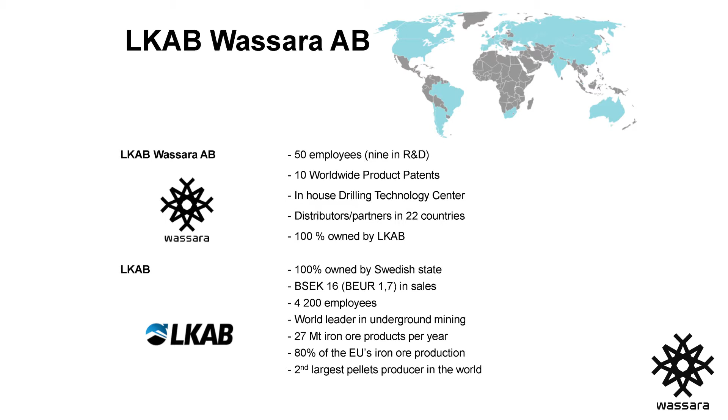LKAB has 2 mines in the northern part of Sweden, in Scandinavia. They are very strong in logistics, which you have to be for iron ore production. They have a logistics system so they can ship the pellets, the final result from the mining process, with one harbor in Norway and one in the Baltic Sea.

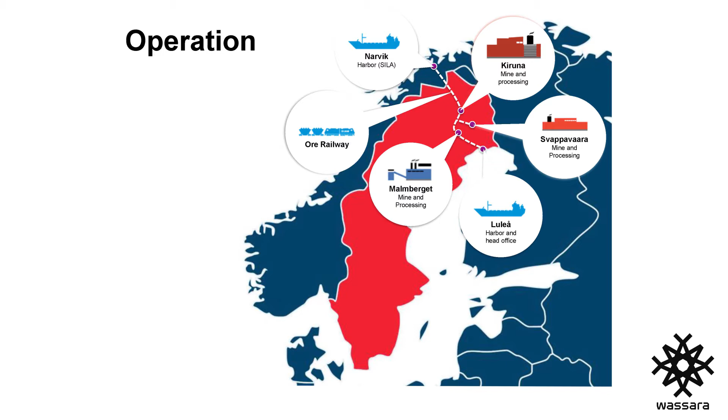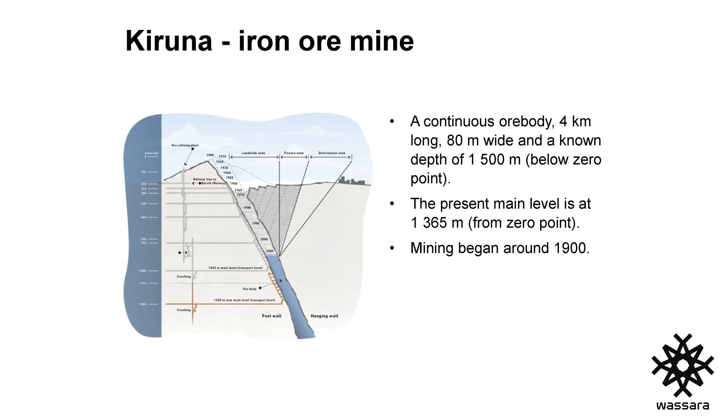The biggest mine is the Kiruna mine, in operation for more than 100 years. It's a continuous ore body looking like this. The other mine is called Malmberget mine, which is a little different, with a number of ore bodies. It also has a very long production history, more than 100 years.

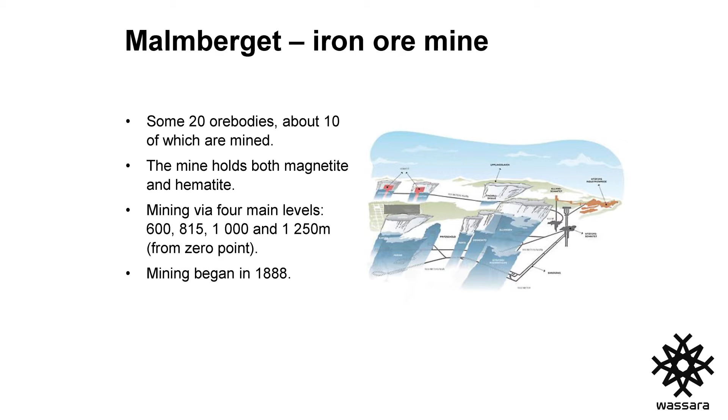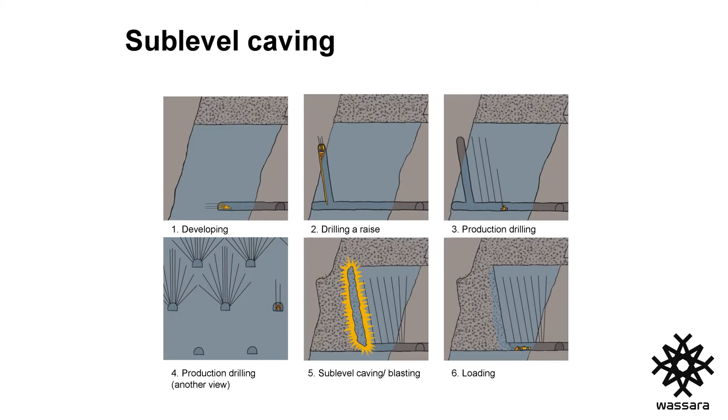Both mines use sub-level caving. The drilling is done in a fan shape, like this. You do the development, you do the drilling of a raise, and then you do the production drilling. The Wassara part is done in the production drilling; the other parts use other drilling technologies.

If we go back, say 25 years ago, LKAB had huge problems with profitability. They were more or less bankrupt, so they had to do something with the whole logistics and process, because they mainly compete with big open pit mines, like in Brazil or Australia. If you're not good in logistics, you cannot compete with an underground mine in iron ore. You have to have the mass, the big scale operation, and keep the cost down, otherwise you will not survive.

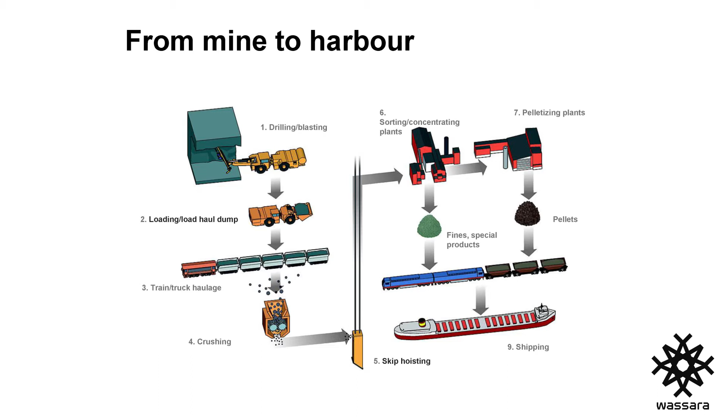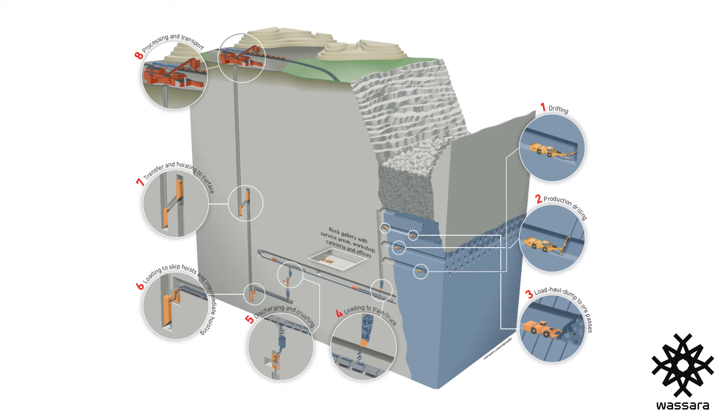So they started a project involving a number of different things. Inside the mine, they improved more or less everything, but a very important part was the production drilling. To upscale everything, you have to drill long holes and be able to blast a big mass every time. Then they came in contact with Wassara, the people developing this water-powered down-the-hole hammer.

Actually, it was 3 guys in Atlas Copco who came up with the idea of using high-pressure water instead of high-pressure air for powering down-the-hole hammers. Atlas Copco were not really interested, since they had their own compressors and other techniques, so they didn't believe in it. But LKAB believed in this, so they started working together, forming the Wassara company, and after some years it was a success.

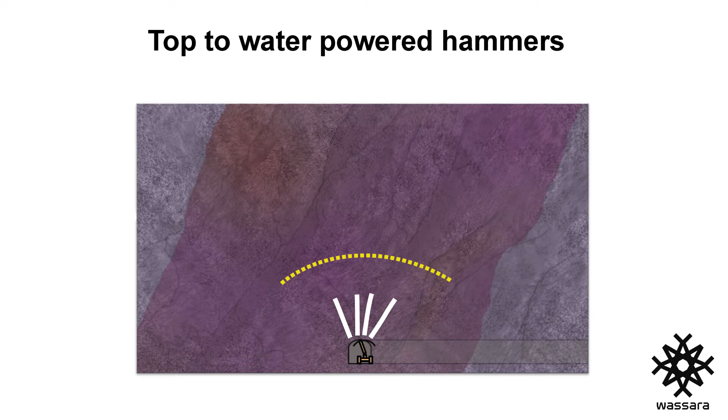So what they do is they drill. In the past, they drilled like this.

They drill with top hammer technology, which you're probably familiar with. It's rather simple, and you drill very fast, but you cannot drill very long holes. You get a lot of deviation, and you lose energy, so you don't have much power left if you reach more than 20 to 25 meters.

So this is what they did in the past. They could not drill very long holes. Then they introduced Wassara, and now they can drill a fan like this.

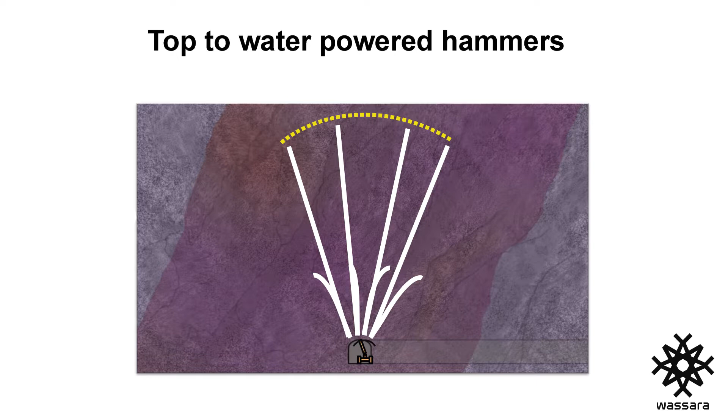Extremely straight holes, more than double the length. The reason why they have to stop now is that the distance between the top part of the holes is getting too big. Otherwise, you can probably drill 100 meters or even more.

So that's not the limitation. The limitation now is that the size of the block when you do the blasting is too big if you go bigger, because you're drilling like a fan. I'll come back to this - the second part of the presentation will show what they are doing in the future, or what they plan to do. This is the limitation now: you cannot drill longer holes because you get too much distance between the holes.

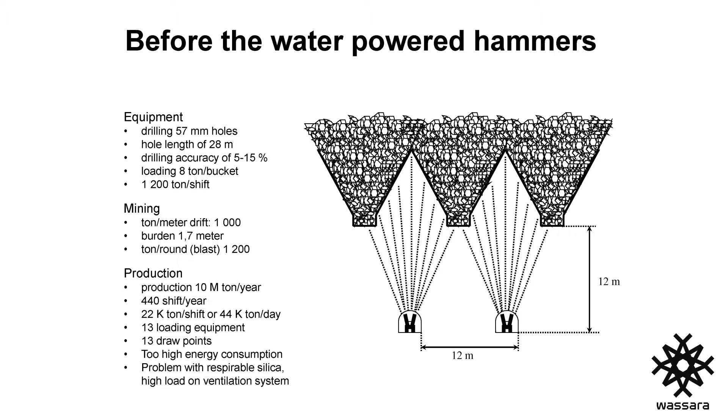So these are just some numbers from the past, before they used the Wassara hammers. They drilled not very long holes, say 28-meter long holes, with relatively small diameters. Every time they blasted, they got 1,200 tons out. They were using a lot of equipment and a lot of people in the mine, meaning they had high costs. And this was not good enough to compete with the open pit mines.

So then they introduced the water-powered hammer. The water-powered hammer is a down-the-hole hammer that uses high-pressure water to power it. We use up to 180 bar if you drill in hard, solid rock. If it's a softer formation, you use less pressure.

The reason why you drill extremely straight is that water is not compressible. So even if it's 1 bar or 200 bar, it's the same volume. So even if you drill with 180 bar, when you release the pressure coming out of the bit, you have no expansion of the media. The same volume of water going into the hammer is also going out of the hammer, meaning the water and the cuttings leaving the bit and going out of the hole move extremely slowly, so you don't need a lot of space between the diameter of the hole and the diameter of the hammer.

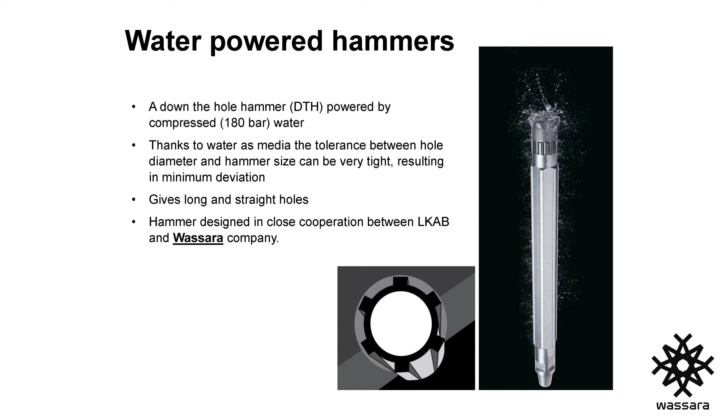As you can see in the pictures, all the hammers have stabilizers or ribs on the side of the hammer, and the ribs have more or less the same diameter as the bit. There's just a 2 to 5 millimeter gap. This is the reason why you drill straight. And if you want to drill even straighter, you put the stabilizer behind the hammer.

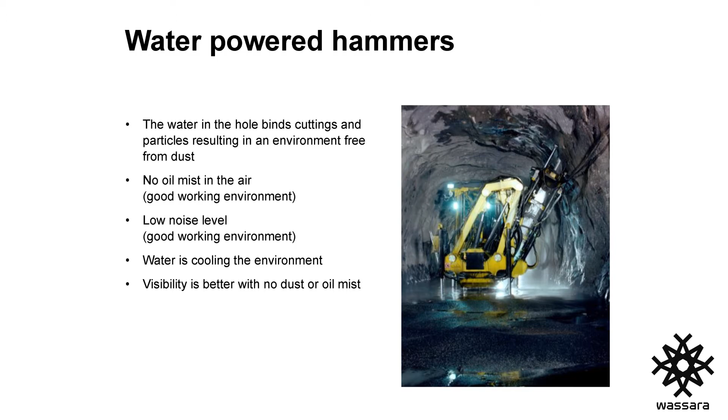Then we started this partnership with LKAB and Wassara. The main reason was the straight holes, but then we also found out there were other benefits. The water binds the cuttings, so it's like fresh air when you are drilling. There's no oil - the hammer is powered by pure water, with no lubricants, no oil in the water or in the air. There's also a low noise level, of course, because you have the hammer in the hole, compared with the top hammer.

And you have the water cooling the atmosphere, so it's a very good working environment for the drillers. It's also very easy to see the operation because you don't have any dust in the air. These are the arguments for mining. When we come to other applications, it's mainly that you drill in a much more safe and careful way - you don't damage the formation you're drilling in because you don't have this expansion of the media. But in mining, it's mainly that you drill straight holes, and it's a very good working environment for the operators.

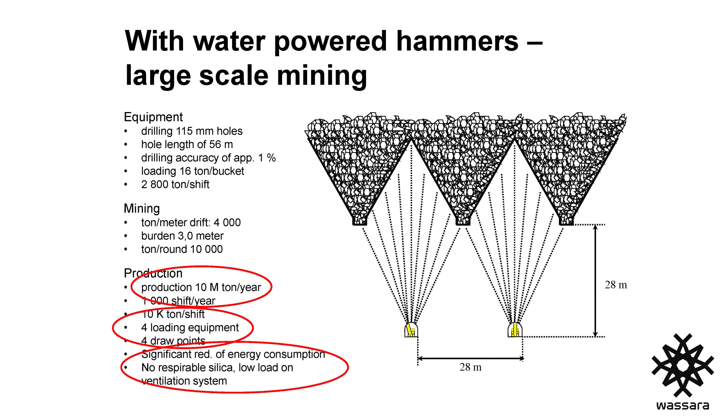So now, using similar numbers but with the water hammers: they drill with a 4-inch hammer today, reaching close to 60-meter long holes. They have very good accuracy - over the 60 meters, they have a deviation of approximately 1%.

So extremely straight holes. And as you can see, the most important number now is that instead of 1,200 tons per blast, you get 10,000 tons per blast. So everything is upscaled - you use less equipment, less people, you reduce your cost, and now the mine is extremely profitable. This is the only technology that can do this in a cost-effective way.

Of course, you can do this with core drilling also. You drill also extremely straight, but then you drill slow, and it's very expensive.

So again, less equipment in the mine, and also a much better working environment for the operators, thanks to no dust. So if we summarize this, increasing the length of the holes gives you a much more profitable operation. So, a short video.

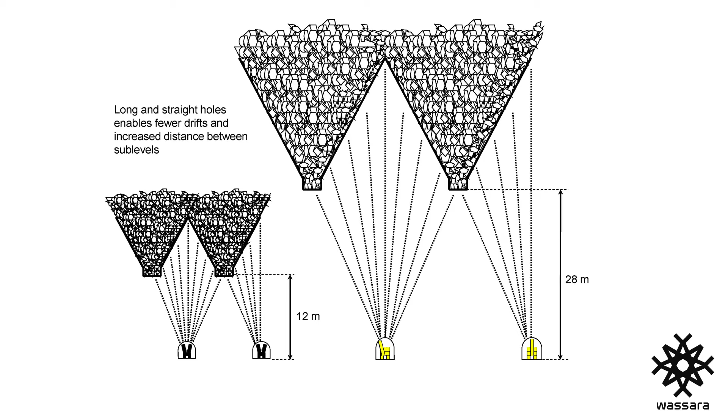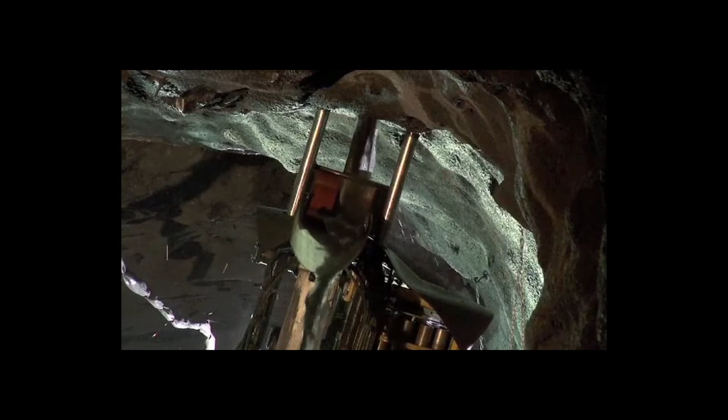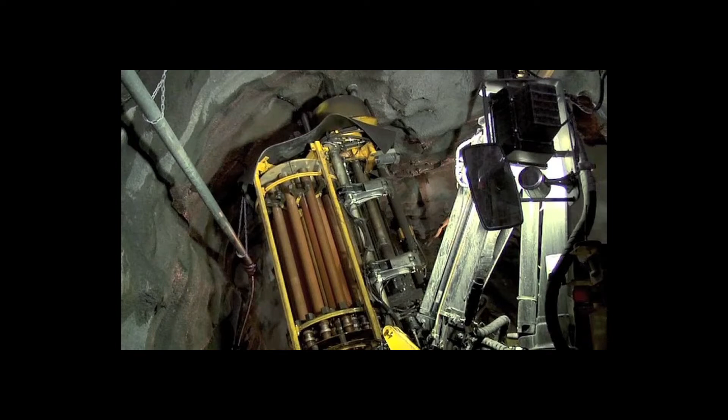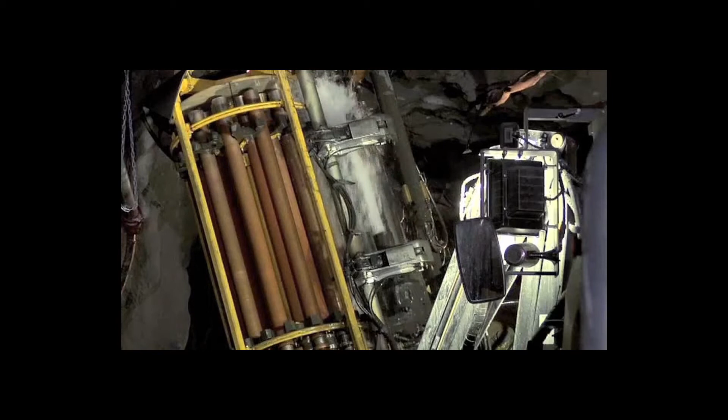Here you see the drilling and the water coming out. No dust, no oil. Water is coming out very slow, and this is another part of the project - most of the drilling is automized, so even if there's no dust, you don't really have operators close to the rigs. This is how it looks like. This is the water. And here you have the operators.

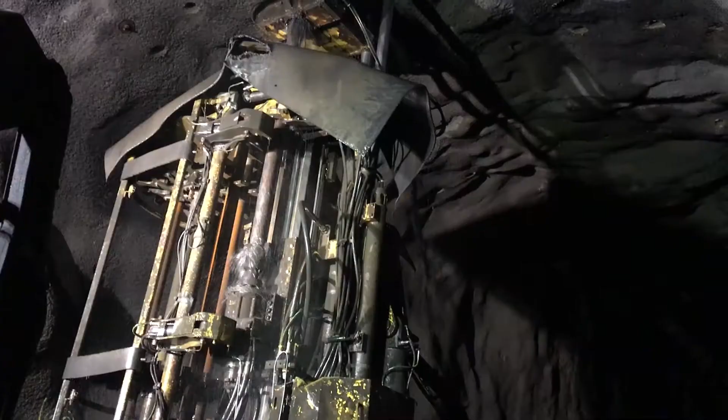Drilling is one part, but they've also done a lot with automation and logistics in the mine. This is showing the working environment at the rig - no dust, very clean, and very low noise level, even if you don't hear it. So this is the upscaling, making the mines extremely profitable.

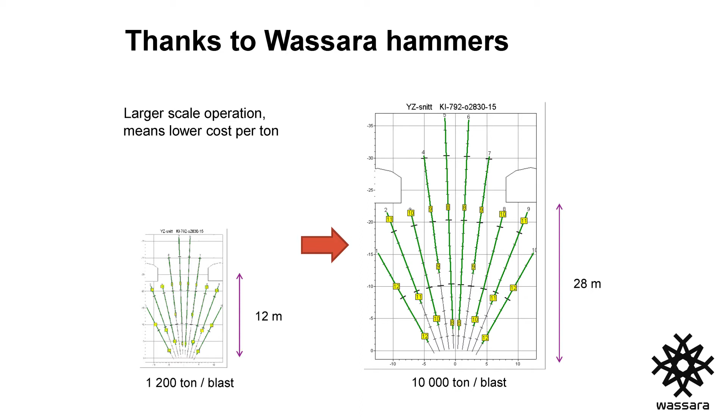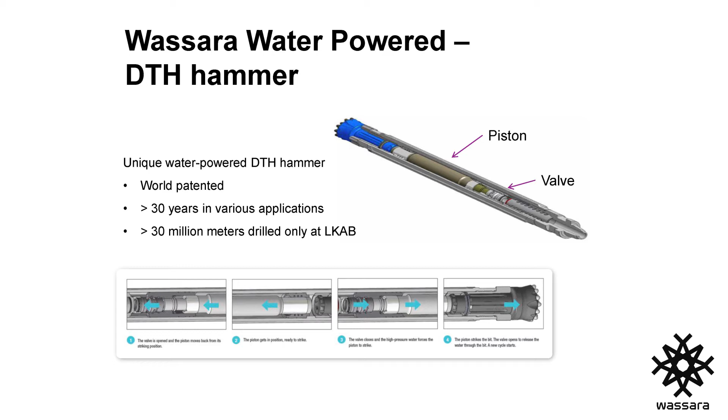So again, this is the hammer. It's nothing new really, it's been on the market for 30 years, so it's very well proven. They are drilling I think 2 million meters every year in the mines using the 4-inch hammer. So it's very similar to an air hammer.

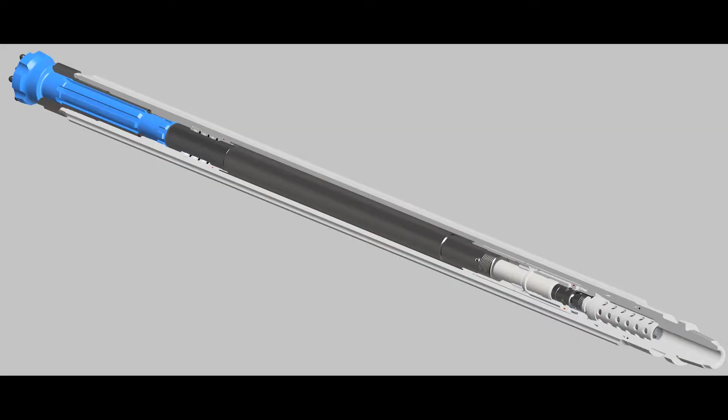You have a piston moving up and down, but thanks to the not-compressible media, you need some other components in the hammer. In this case we have a critical product in the valve - maybe you can see it here. It's a piston moving and a valve moving, and they move in a certain way, opening up channels inside the hammer so the piston can move up and down.

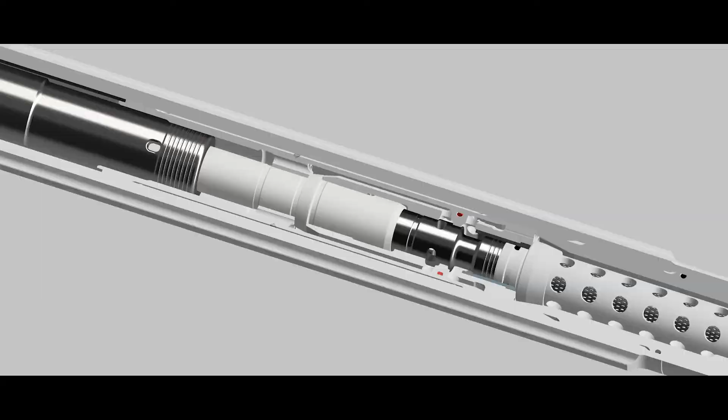And if we go really in detail with this, you see how they work, and it's very tight tolerances here. So it needs to be really clean water going into the hammer. Otherwise you will block the channels and have a lot of wear on the parts. And if you have a lot of wear on the parts, you don't get enough pressure up inside the hammer, so you have to change the parts very frequently. Water quality is very important for us to get a long life out of the hammer.

This is moving with double the frequency of an air hammer - we are between 50 and 70 hertz. So really high frequency, meaning you have to rotate the hammer slightly faster than what you do with an air hammer.

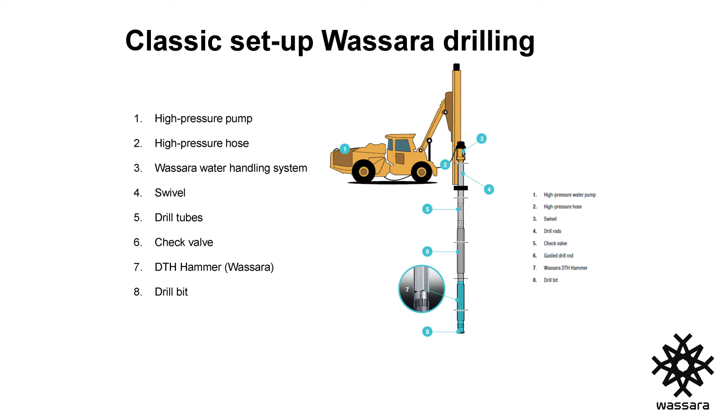This is a typical setup today. You have a rig, a water pump, a water swivel, the drill rods, the hammer and the bit. All this you can buy from us, and now also the rig - you can talk to Medatech about making a special water-powered rig for water-powered drilling. Some clients use a water pump on the rig, but I'd say most clients use a standalone pump, electrical or diesel. So it's up to you if you want it on the rig or not.

So this is a typical setup today. You can drill in all directions. We prefer to drill upwards if possible, because then it's easier for the cuttings to come out. If you drill down, the cuttings come up very slowly, and there's a risk they'll stay in front of the bit and slow your operation. So if possible, we recommend drilling in the upward direction, but there's no problem drilling down, horizontal, or any direction. So this is what they do today.

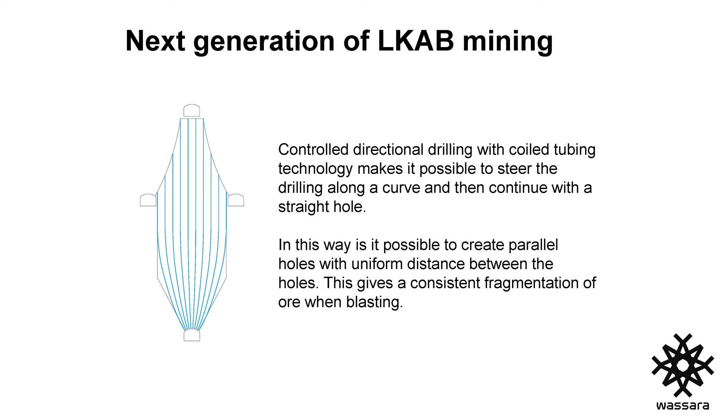So now they've started a new project 2-3 years ago to take the drilling into the next level. What they want to do is this: instead of drilling a fan, they still drill out like a fan, but they'd like to drill the holes in parallel, keeping the distance between the holes, and then you can drill much longer.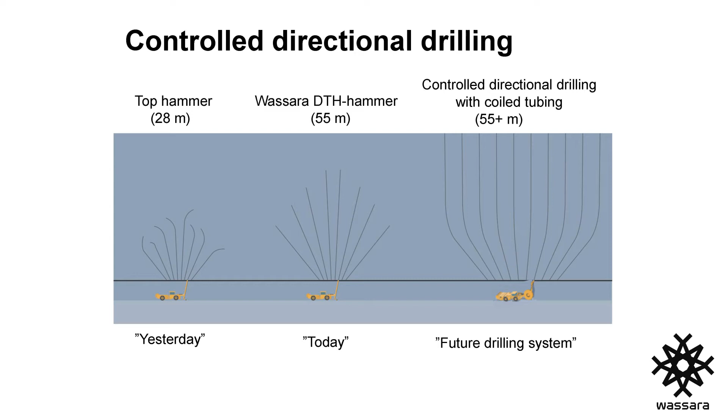So again, in the past: top hammers, short holes. Introducing the water-powered hammers: longer holes. And now the intention is to use a coil tubing rig and drill parallel holes, meaning you control and steer the drilling where you want to go. So you get consistent fragmentation, an optimized draw flow, and because you're using a coil tubing rig, you eliminate the rod handling - so you are very quick in the hole and out of the hole.

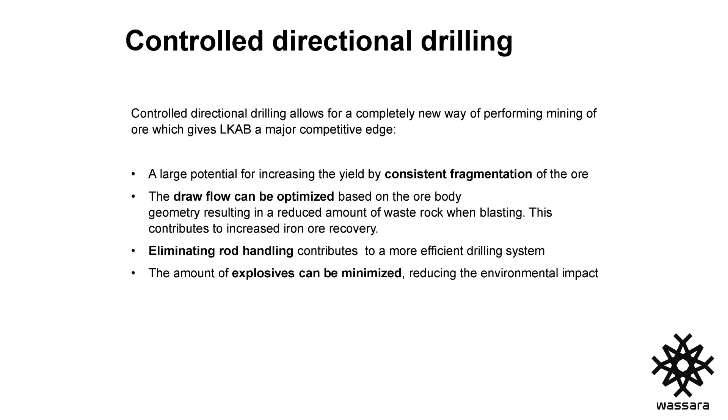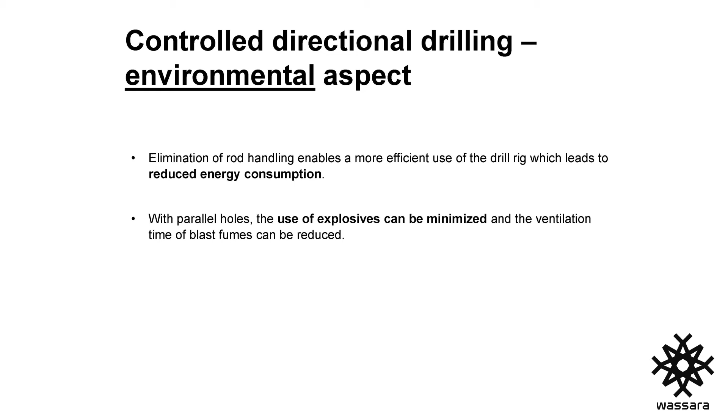And the amount of explosives can be reduced thanks to this. In Scandinavia, environmental aspects are very important, so just to focus on this, you will reduce the energy consumption with this, and you will reduce the amount of explosives. So what is important in the project? We can say it's 4 different parts.

To be able to do this, you need to have a coil tubing rig. Coil tubing rigs are available on the market, but not many of them are drilling in this direction. Most of the coil tubing rigs available on the market are drilling down. Most of the coil tubing rigs available today are using a very, I don't know the exact word, but a big wheel, because if you drill on surface, you are not limited to a certain space. But now we are inside a mine, so you have to make everything small, and you have to drill up. So that's one part.

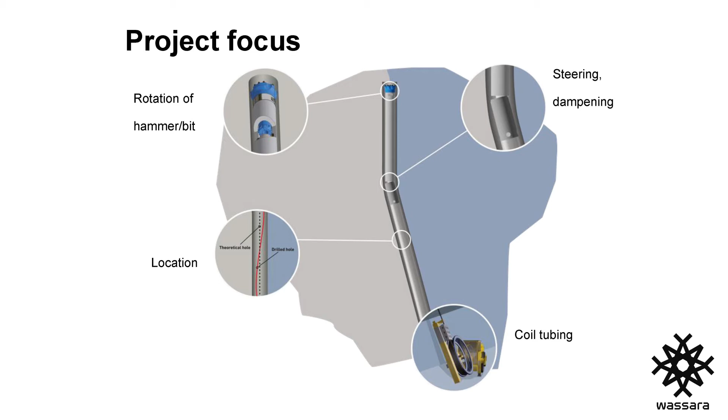The other part is the location. You have to know where you are all the time, even when you are drilling. So during drilling, you have to know where you are. You cannot stop and measure and drill and measure. So when you are drilling, and you are drilling with a hammer that is creating a lot of vibrations, you have to have a tool that can tolerate the vibrations while you are drilling.

The third part is the steering. So you have to be able to steer, go left, right, and in all the directions you want to go. And then you are using a coil tubing rig, so you cannot rotate the drill string or the coil. So you need to find a way to rotate the bit or the hammer that's in the bottom of the hole. So that's the fourth part. So these are 4 different areas we're working on today. We are very close to, or we even have solutions for 3 of them.

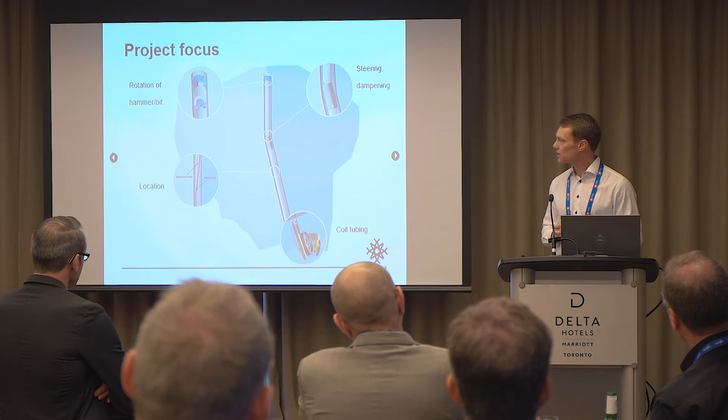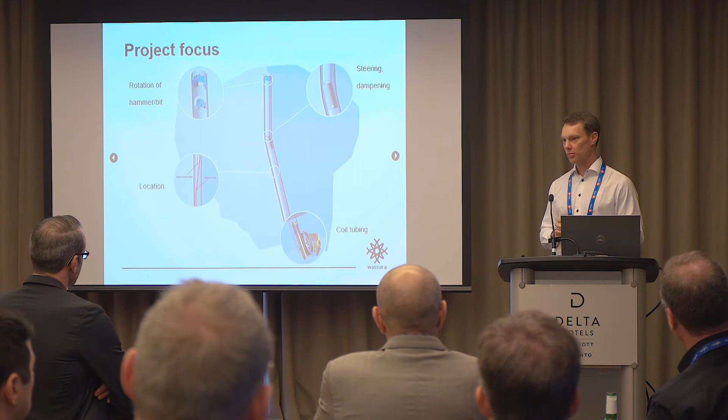Where we are now facing some problems is the rotation of the hammer and the rotation of the bit. The intention was just to rotate the bit, keeping the hammer fixed. Now it seems that we are getting away from that, and we will use a mud motor behind the hammer, rotating the hammer. The problem is that the mud motors available on the market today are expensive, and they are very long. And we don't have that space because we have to bend in a much shorter radius than what you normally do. So we have to make sure we have a mud motor that is small enough, but still powerful enough. So that's also something we're looking into.

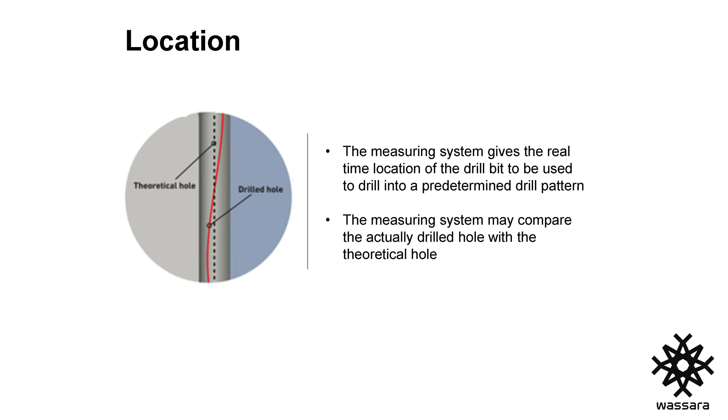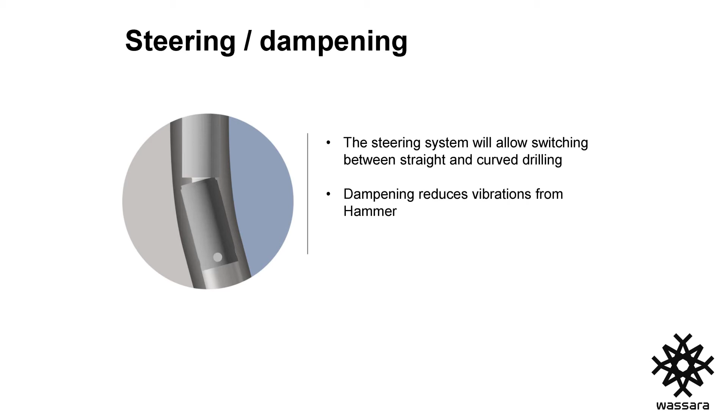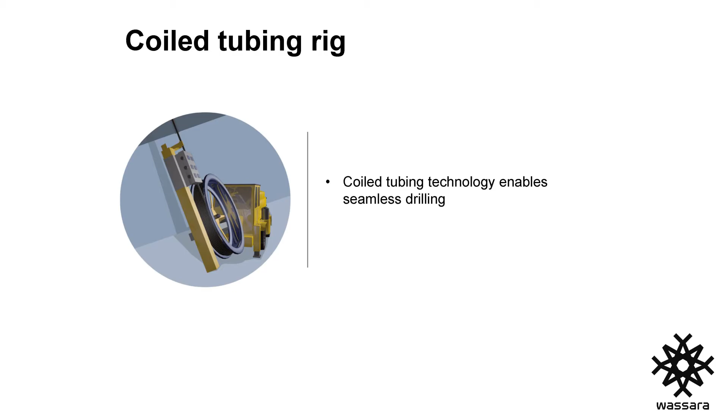So location, you have to know where you are. We will use a gyro type of measuring tool here, and it's working fine today. So there we have a solution. Steering, again, you have a lot of vibrations from the hammers. You have to have a very robust tool to make sure that you can steer. This we also have. And the coil tubing rig, it was not possible to find a rig on the market, so we have designed our own rig, and that's also available now for us. I will show you a picture later on. So the main thing we are missing now is the rotation of the hammer, but we will find a solution for that too.

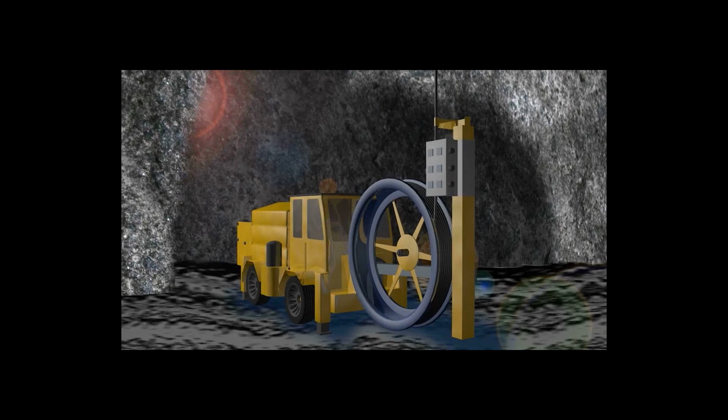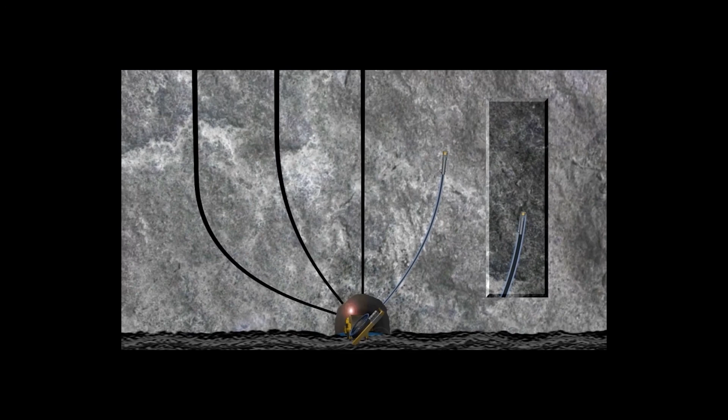So again, showing a video, maybe there is some sound. Again, going back, you have the top hammer, a lot of deviation. You have the water powered drilling, no deviation, close to 60-meter long holes, but then you have to stop. So in the future, the intention is using a coil tubing rig and drilling holes like this. So now you don't drill straight holes anymore, you drill in a controlled way instead. You are measuring all the time where you are, and then you go left or right. So you drill your parallel holes. And the intention today is to drill approximately 100-meter long holes.

Then there is another issue. Then you have to put explosives in the holes. And to have explosives in a 100-meter long hole, that's a challenge. So that's another project, to get it in and to make sure that the explosive stays in the hole. So that's the full project. We already now see some spin-offs. So even if you don't buy the complete package, you can buy maybe parts. So this is the first product we are introducing. It's what we call OWD, Optimization While Drilling.

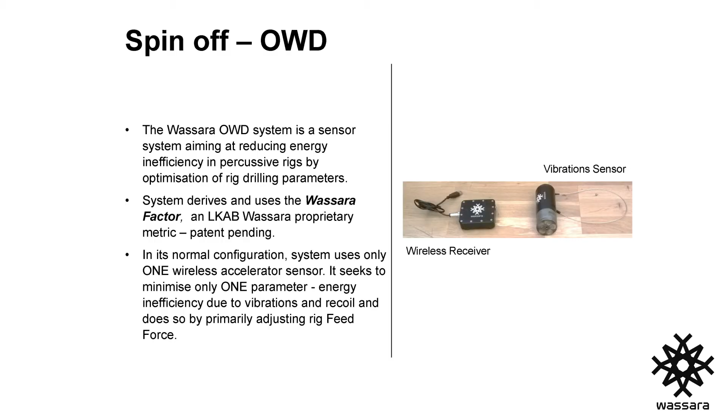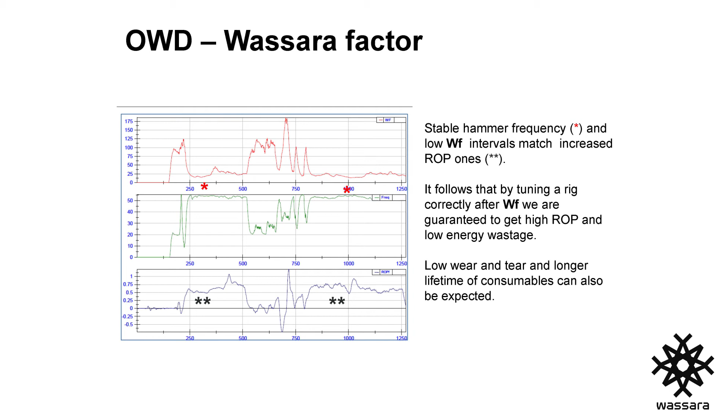This is a tool, a sensor, measuring and making sure that you use most of your energy to break the rock and reduce the energy going back to the rig or back into the drill string. And we have come up with what we call a Wassara factor. It's a patented factor. It's very simple. We are just measuring the vibrations coming back. So there is a sensor that you place on the rig measuring the vibrations. Important for good operation is to have a stable frequency and as low energy coming back as possible to the drill rig.

And this is what this tool is showing. So you just put the sensor on the rig and then you measure the vibrations. This you can do very simple, or you can do it more automated. So you can use just an observation: you can put this tool on the rig, and then you can come back and look at the data later on and see if the drilling was efficient or not, and then you can adjust some parameters.

Or you use it in an open loop. You follow the factor all the time, and then manually you change parameters on your drilling, and then you increase your efficiency. The tool is not exactly saying what is wrong, but it's just saying that you can do it better. So you can increase the water pressure, or you can change the feed force, or you can change the rotation speed. So you play with different parameters, and as soon as you see the factor is going down and it's getting stable, then you know that you are doing something right.

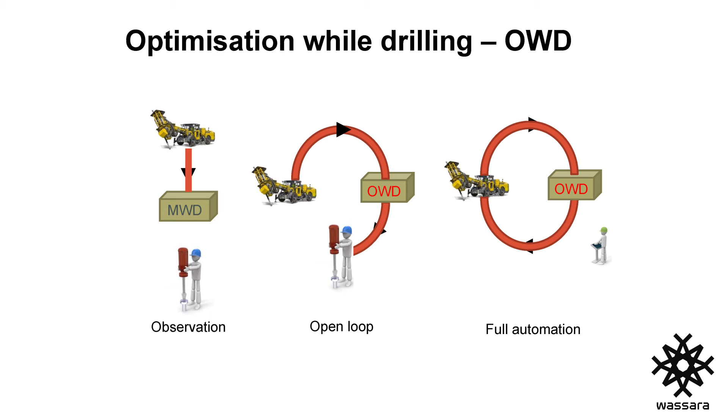In the future, and what they do already now in the mines with LKAB, is that they have integrated this system to the rig. So the rig is reading this factor and then automatically changing some parameters to optimize the drilling. So it can look like this. You get a graph, and when you see that the graph is going down, you are doing something right, and when it's stable, you're also doing something right.

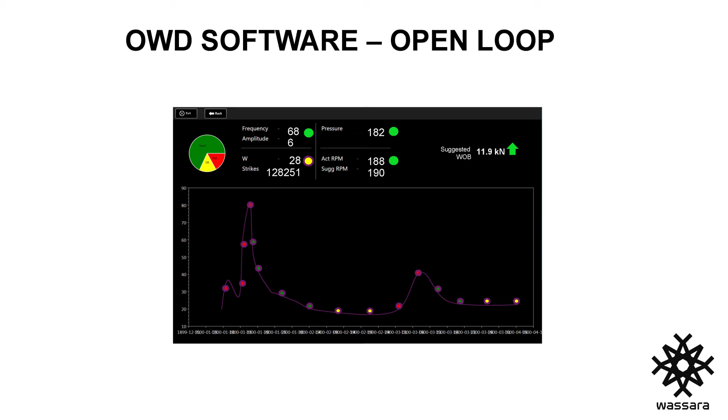So this is a tool we use today. Our service technicians are using this when they go out to sites and talk to clients and try to optimize their drilling. They can take this tool with them and just place the sensor on the rig somewhere, and then they have a small computer, and then they get this out, and then together we can optimize the drilling.

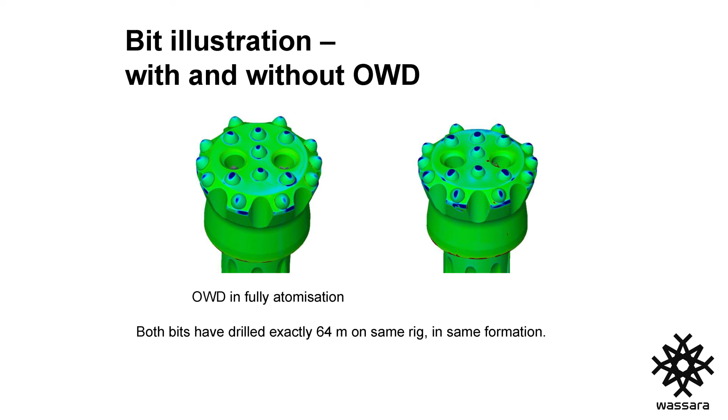And we see already now in the mines, when using this fully automated system, this is maybe not easy to see, but this is a drill bit. The blue parts are where you have the wear on the bit. So with the same number of meters, same conditions, you can see that the bit to the left has less wear than the bit to the right.

So just the savings in bit life and the bit cost is today good for the LKAB mines. They are happy with just seeing this, that they can reduce the number of bits. And it's a lot of money just in the bits. So that's a small part. But it's showing that if you optimize the drilling, you get more meters out, you get longer life of the equipment, and you get a more cost-effective operation.

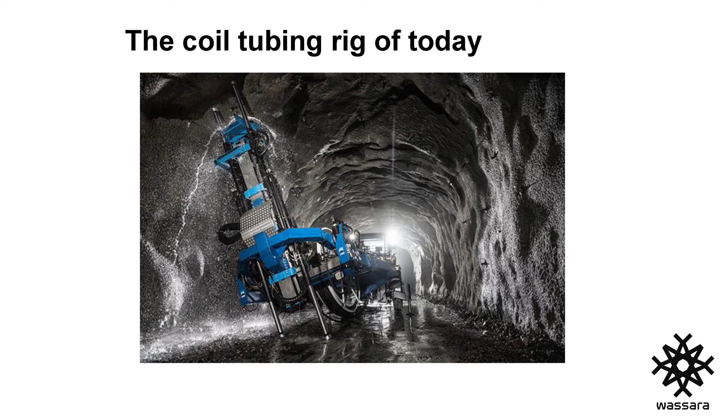So this is the rig today. So we have a prototype rig, or the second prototype rig actually. So everything is working today in the mine. So this, they believe, will be the future of drilling in the mines, in the two mines they have.

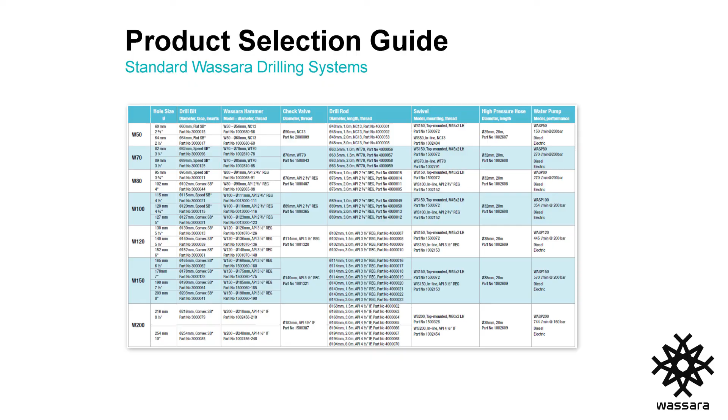And then this is back to the water-powered hammers. This is the range of hammers we have today, the standard hammers. So you can drill everything from 60 millimeter holes up to 10-inch holes. And also, we have not been very successful in getting into mines for production holes. What we see is more easy to get into mines is applications more like this, where you drill service holes, for example, or special holes in the mines, where you want to drill extremely straight and long holes.

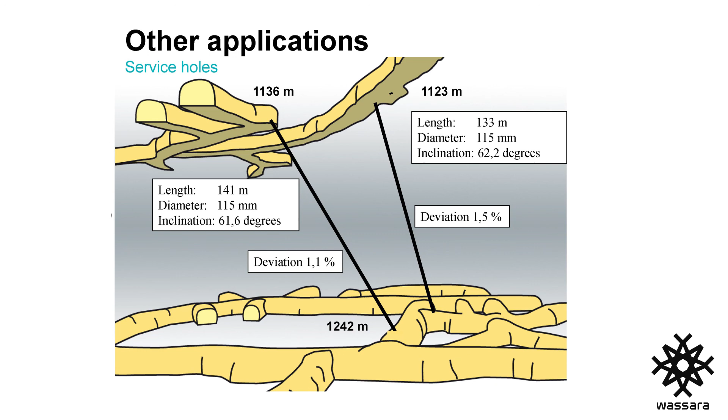But to summarize everything, this is the mining part we have talked about now. Where we are growing mainly today is in what we call ground engineering. So all the major players in the world, I would say, with focus in Europe and in North America, are using this technique for different applications within ground engineering. It's for grouting, it's for foundation, dam rehabilitations, for example, is a very important part for us. Every time you want to drill in a safe and careful way, this is a very good technology for it.

But that's for another presentation to show you what they are doing. So I have been focusing now on the mining part, but that's, again, a small part of what we are doing today.